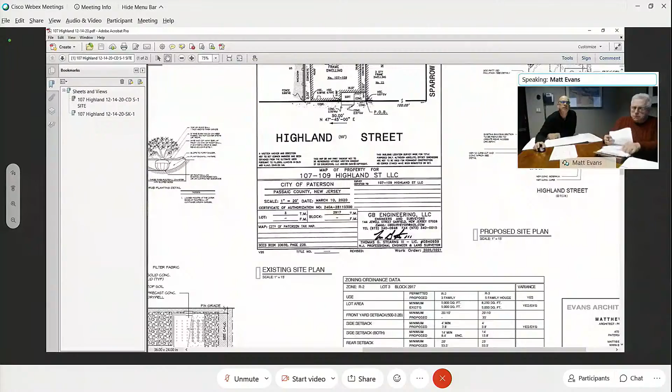You're going to be posting those? Yeah, I can post that. Let me post it now. They'll be coming up now. So we have the existing site plan, which is a survey showing the existing conditions: a 2.5-story frame multifamily dwelling.

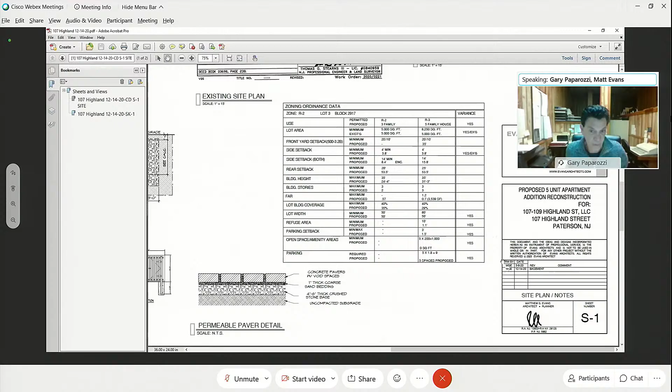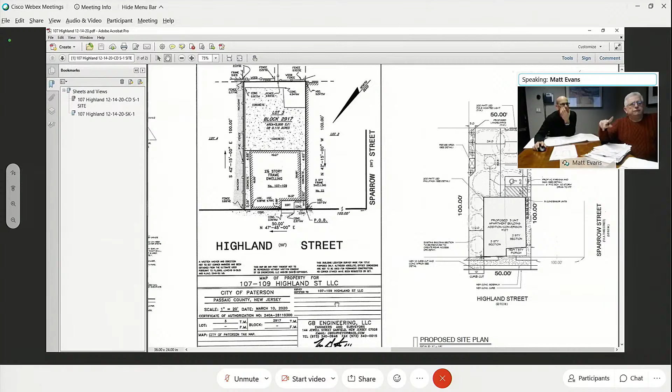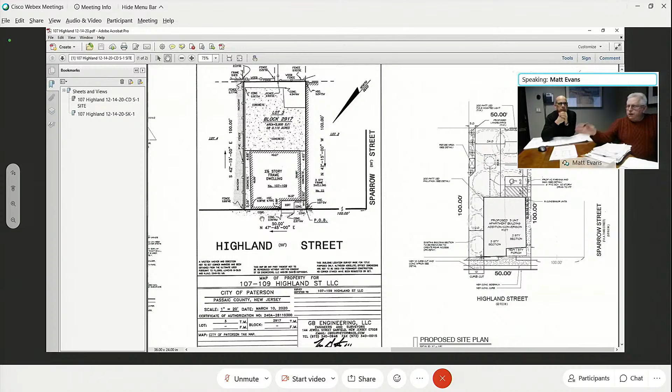So as you can see on Highland Street, the existing structure on the site plan shows the impervious area I mentioned. What we're going to do is show the proposed site plan. If we could go back to the survey - that's an existing three-family structure, just to clarify? Yes. And that property has no front setback whatsoever, right? It's right on the property line, and there's a rear yard area that's not easily accessible - it's just impervious area with a sidewalk to the back on each side. So from there, we're going with a major upgrade.

What we're going to do is reconstruct that building and add a third floor to a portion of the building. I'll go to the site plan. What's significant here is that according to the site plan, we're removing a section of the building on the left, or northerly, side of the property, and that's going to allow us a 12-foot driveway to access the rear yard.

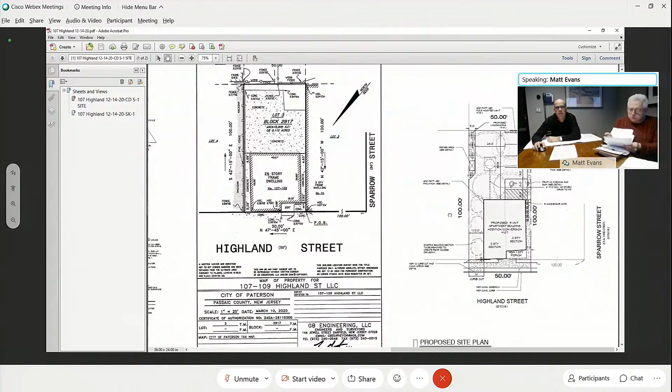We've proposed 5 parking spaces in that rear yard, one of which is a handicap spot. We have a refuse area, landscaping around the perimeter, and lighting. That driveway allows us to use that area to park, so it's a definite improvement on the site - that's part of the proposal.

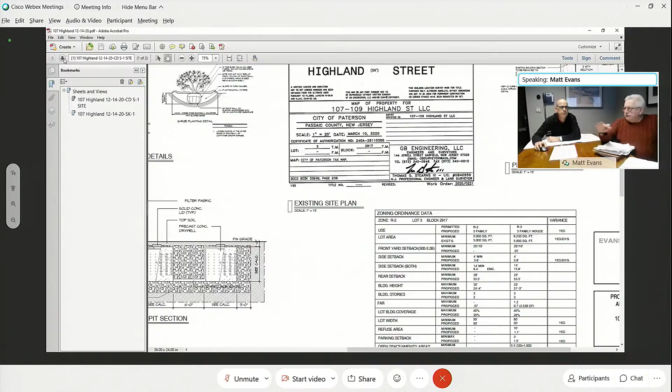Let's go to the architecturals - we can come back to the variances afterwards. First, I'll do the first floor plan. On the left side, you can see the existing building section to be removed. That whole section on the left side is going to be removed, and we're reducing that footprint, putting a 1-bedroom unit on each side - so there are 2 one-bedroom units on the first floor. They have laundry facilities, and there's a main stairwell that accesses the second and third floors.

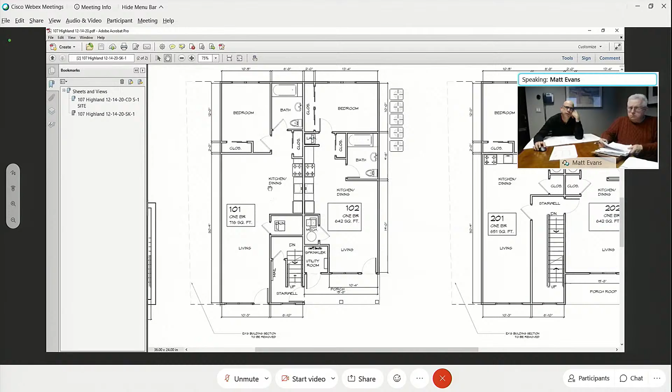Apartment 101 is 716 square feet, which is over the minimum requirement of 600 - we have about 116 extra square feet to work with. Unit 102 on the right side is 642 square feet, which meets the minimum requirement. These would be handicap-accessible units, and since they're on the ground level, they meet the requirements for handicap accessibility.

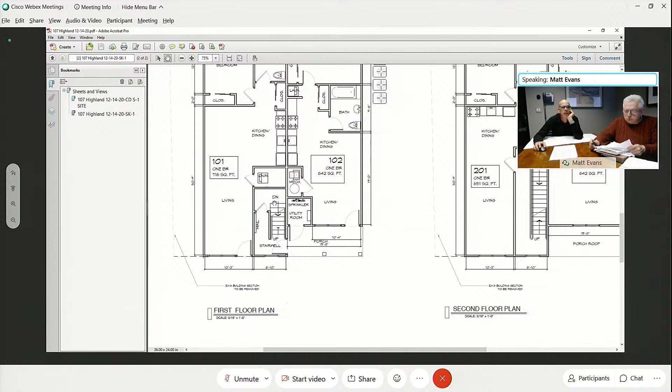There's a front porch which would be reconstructed on the front, and there's also access to a basement, a small basement. There's a door, and we're showing the stairs going down. We have an unfinished basement with a low ceiling height, which would remain just with mechanicals. It's basically a little cellar area, just utilities only, not occupiable.

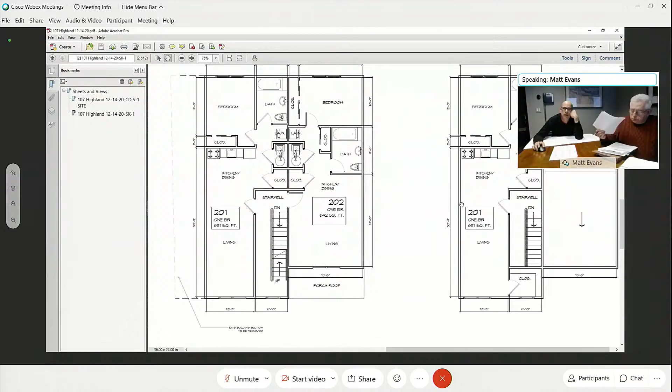Then we go to the second floor plan, which is apartment 201 and 202. 201 is 651 square feet, similar to the one below. 202 is 642 square feet, similar to the unit below that. They both have laundry facilities too. Then we have the third floor, which is the left side of the building, just a 1-bedroom, 651 square feet. So they all have mechanicals, laundry, bathrooms, kitchen, and ample living space on all those floors.

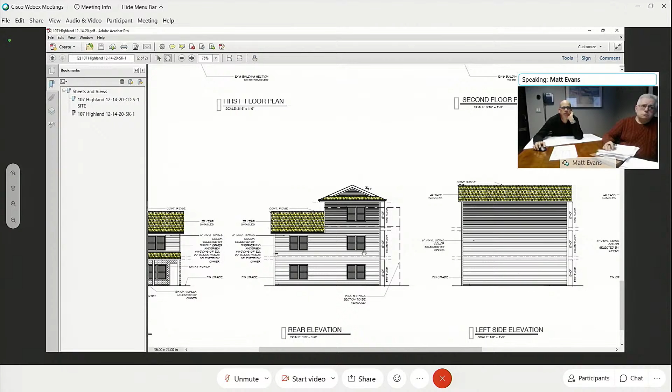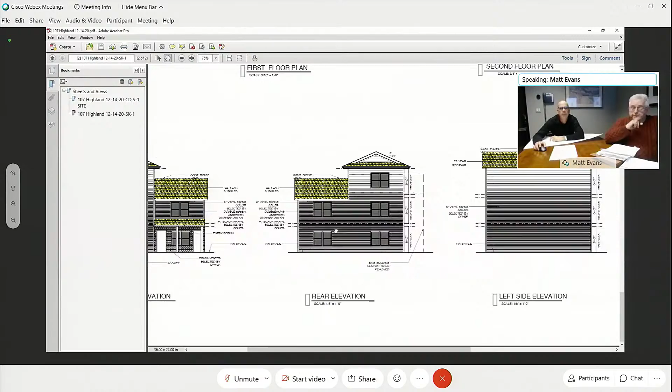Going to the front elevation, as you can see, we're adding that third unit on the top. The existing building would be reconstructed with new siding materials, new roof over the porch, and you can see the 3 entrance doors to the apartments. Showing the rear elevation, similar, it's more simplistic, but we have all new siding, windows, and roofing. Left side elevation would be all new materials, and then the right side, the same condition where we have all new materials on those pieces of the elevation.

So we can go back to the site plan. Yes, and then we show the details.

Going to the zoning table, we're in the R2 zone, and the property is an existing non-conforming 3-family in an R2. We are proposing to make that a 5-family house, basically 5 units, which would be all 1 bedroom. So there's low intensity units on these, converting this down to 1 bedroom units.

The lot area minimum required is 5,000. We have 5,000 square feet for the R2, and for the R3 we need 8,250. We're looking for a variance for lot area on that.

Front yard setback, that's pre-existing non-conforming. We're not adding anything to the front yard, that would remain. Side setback, we have 4 and 14. We have 4, and on the one side we have 3.8, which is a little shy of 4. We'd be seeking a variance for that. It's pretty much in a pre-existing non-conforming condition.

Then we have, both of those was 14 feet, and existing was 8.4, and we'd be removing that previous non-conformity and meeting that with both side setbacks at 15.8 feet. So it's 1.8 feet larger than the minimum requirement.

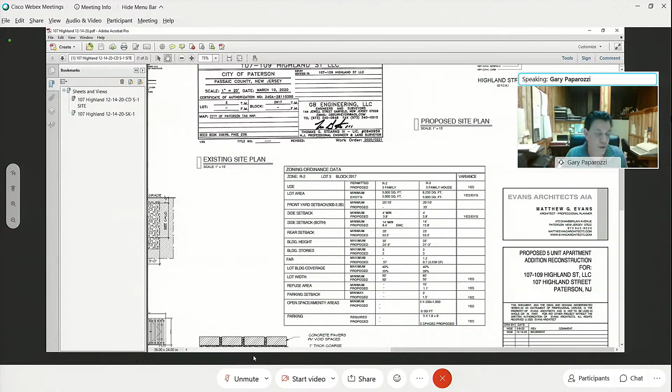So if this plan had to be expanded to include designation of utility spaces, that could be done if need be? Yes. Okay, when I was there, it looked like the basement went through the whole building. Are you saying it did not? Because I don't have access to the inside. Now, it looked like it because there was a window, I thought, in the back as well, but you're saying the basement is short.

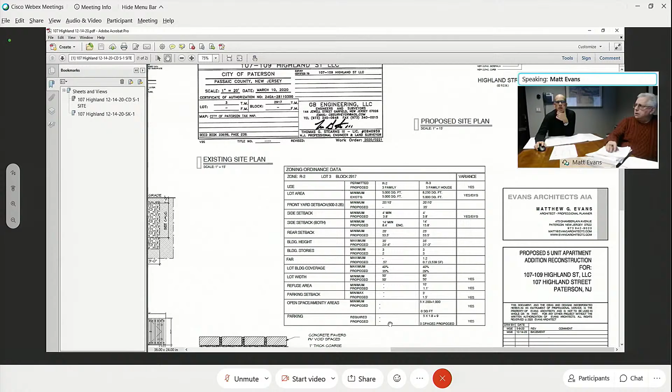Yeah, it's just a 20 by 20 basement section in the front section, but there are areas where crawl space or other ventilation is required for some of the spaces, but it may appear as a basement, but it wouldn't. The basement's not going to be used for any habitable purposes.

It's not for habitable purposes, Mr. Evans. It's included in floor area ratio, which I'm sure you didn't do because I have a different number without the basement. I didn't have a basement. Floor area ratio is only for livable spaces, not maintenance purposes.

No, that's not true. You want me to read it there? Yeah, I'll read it there. What section is that? Hold on.

It's under the definition of floor area. It says, go into definitions, and it says for floor area in dwellings, any basement space permitted to be used for residential purpose, it's being used for residential purpose. It's eliminated in commercial, not in residential.

Aside from that, I got 1.14, which is not a variance, but that was without the basement. So I don't know where you got your 0.7 from, but nobody's gonna reside in the basement. It's not gonna be used for residential purposes, Gary, and as per this description it is for residential purposes because they're using the utilities for residential purposes.

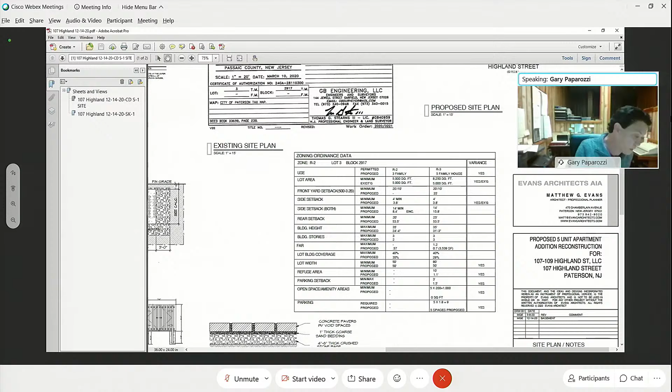That's why I wanted to see the basement plan. Now, if you're saying it's only 20 by 20, okay, but I still didn't include that in my floor area ratio. But there's another section, number 3, it says in all buildings, interior balconies, or cellar, basement with a headroom of at least 7 foot 6 inches.

That's a very low basement ceiling that we have in there. So it's really not habitable, that's what I'm saying, but.

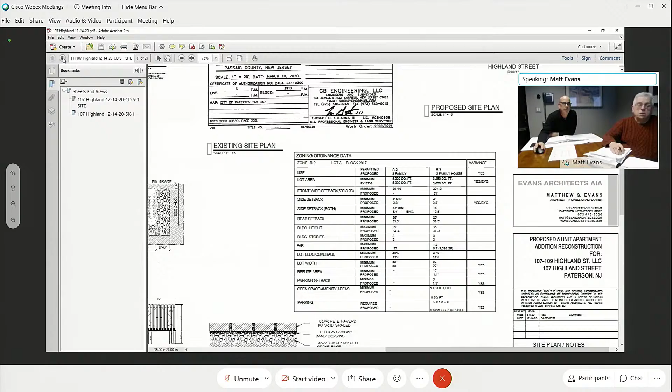I think it's an arguable point, Gary, but we will accept your definition for purposes of variances. We're showing 6'4" plus or minus on the basement area. And it says, in section 3, in all spaces other than the basement. So it doesn't exclude the basement, in my opinion.

Understood. All right, listen, let's go through the zoning chart because I have different variances than you have. And this was also part of the revision that I had asked for, Mr. Margarita. In the future, I am not going to supply a report to the secretary until revisions are made, because it seems that when I make a report, I don't get the revisions until the day of, which I should get 10 days prior.

I already went over this once before. Now, that being said, I have a front yard setback of 20 feet required, 1 foot proposed. And that's a variance, it's not pre-existing because you're adding a roof covered porch in the front. So when you add that roof covered porch in the front, you're expanding a non-conforming and it becomes a variance.

Excuse me, Mr. Paparazzi, repeat that again, please. I'm going through the variances. The first variance, besides use. Use is number 1. Number 2 is minimum front setback, 20 feet is required, 1 foot is proposed, and that's on the proposed roof covered porch that is on Mr. Evans' plan, that was not on the existing survey. The third variance is minimum lot width, 80 feet is required, 50 feet is proposed.

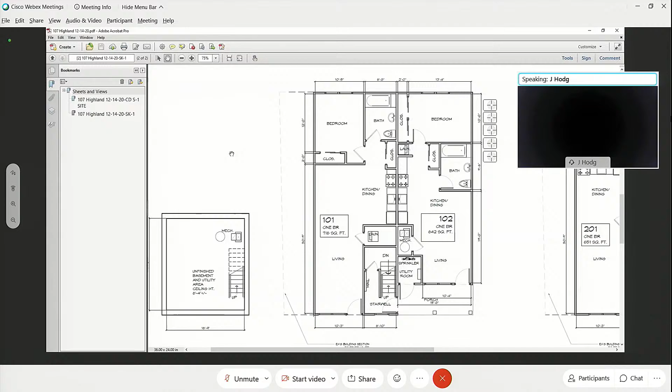Any commissioners have questions of the architect? Yes, this is Jonathan Hodges. How many of the buildings are 3 stories on that block?

Commissioner Hodges, I went through the block, and most of the buildings are 2-family. There was one next door that was either 3 or 4 family, but most are 2-family. And the height that is there now is pre-existing, on the 3-family that was pre-existing. So as far as the height, even though I did not check it, Mr. Evans has it as 31 feet 3 inches. That is pre-existing. From what I understood, the height did not change.

Thank you. You're welcome. Any other questions, Commissioner Hodges? No, that's all, thank you. Any other commissioner?

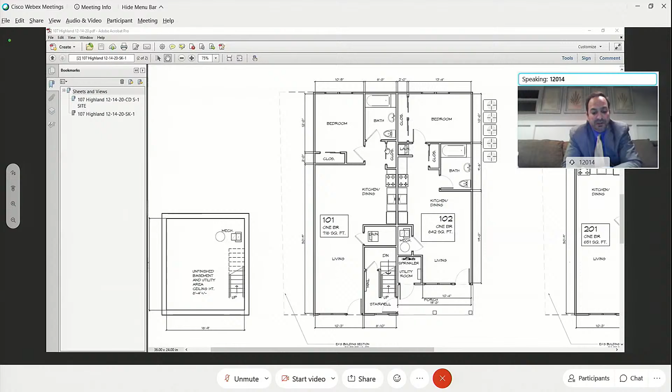May I open it to the public? Yes. To members of the public, if you have questions of the architect with regard to his testimony, please call 973-321-1579 and enter the meeting ID number 711-680-0001. Let's give it a moment to see if anybody calls.

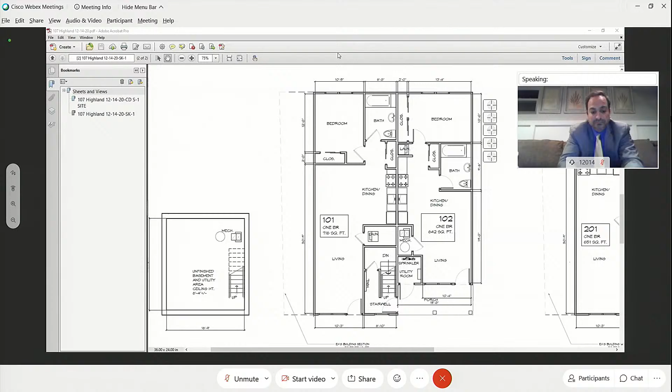Do we have any calls? Chairman Thaxton, commissioners and staff, we have no callers at this time. Okay, Mr. Maricando, your next witness, please.

Mr. Chairman, I'm sorry, I was muted. Yes, I'm going to call the owner. Again, I'll have him discuss what's been done with respect to the outside and the inside of the building. I will point out that the application should stand on its merits. We know that if an applicant is before the board seeking relief, site plan and variances of any nature, his application is to be judged on its merits, regardless of whether work had been initiated and the status of the building at this time. Again, he can confirm whether there are any violations cited, but we would ask the board to follow the applicable law, that the application should not be prejudiced if in fact there is work that has been initiated on the project. Again, that was not something I was aware of, but I think it should not be prejudicial to the applicant in that sense.

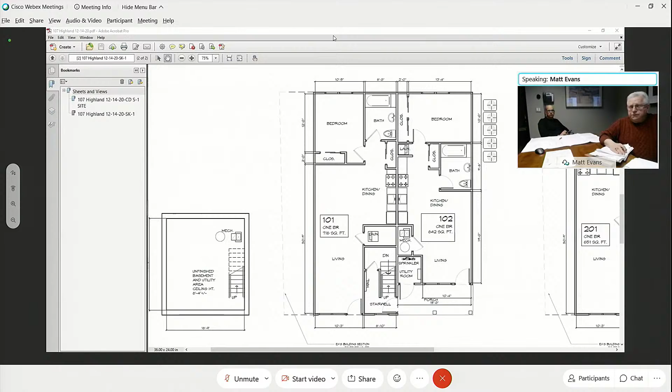I'll call Mr. Barkowski at this time. Yes, I'm here. Please raise your right hand. You swear or affirm the testimony you're about to give is the truth, the whole truth, and nothing but the truth? I do. Okay, Mr. Barkowski, you are the principal of 107 Highland Street LLC? Yes. Hold on one moment, I don't see him.

I don't see him either. You gotta turn on your video, sir. You see me now? Not yet. Are you calling from your cell phone? No, I can see everyone and myself. I don't see you, sir. Okay. Can you see me? His screen is going on and off in the top corner, I never saw it. Video's on. Let me check with IT and see if something's wrong on my end. See the little orange triangle square?

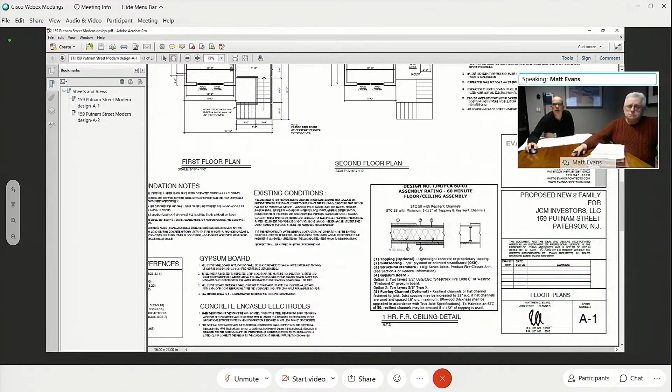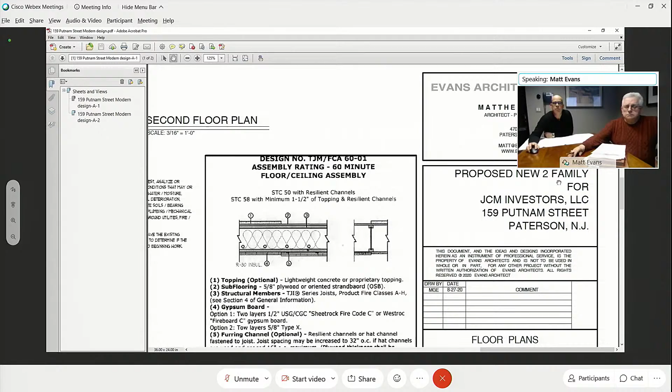Okay, so we have the plan we submitted. We have the date, give me a second, I'm zooming in on it. 8/27/20, so there's no revisions. It's just the proposed 2-family dwelling, and it's a 2-sheet submission with sheet A1 and sheet A2.

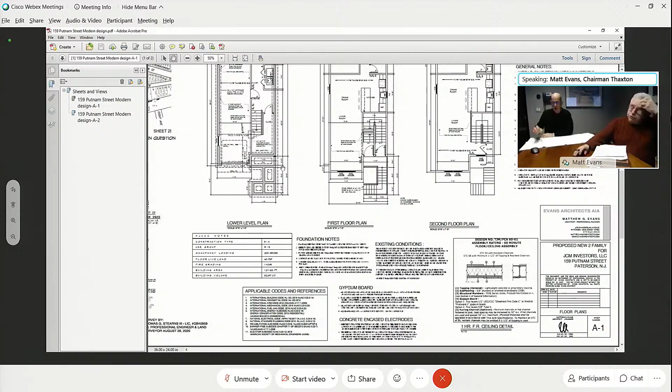Could you start off with present conditions, what we have? So we have a vacant lot, a 2,500 square foot lot. We're proposing an 18-foot 10 by 65-foot deep house, which has 2-car stack parking, storage area in the rear, and a powder room, mechanical, laundry on the ground floor level, and there'll be two 3-bedroom units with 2 full baths on each floor.

The site is presently vacant, is that correct? Yes. Okay, so it's an infill lot that the zoning and master plan calls for hopefully development? Yes. Okay, so you can proceed with regard to describing the units, if you would?

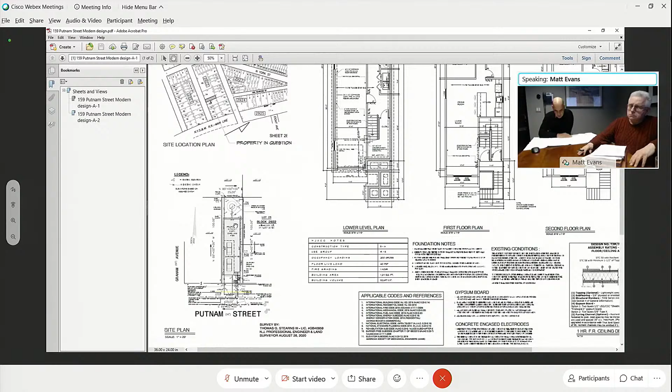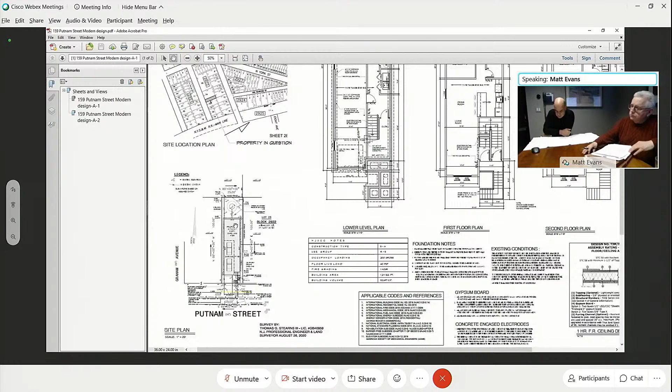Okay, we have, as I mentioned, the ground floor plan and the second floor plan, which is 3 bedrooms, 2 full baths, and then we have a modern kitchen, and we have 2 entrances independent of each other. When you enter the front porch, you have an entrance to the left which enters the second floor, and the next entrance on the right enters a stair that brings you up to the 3rd floor, which is the same layout as the second floor, with the exception that the stair opens up and creates a more open floor with a railing at the stairwell.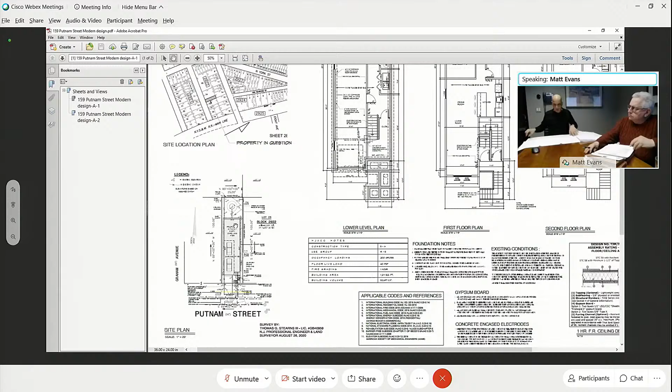Going to sheet A2, we show the elevations, and now the elevations are a little different than some of the other ones. We have a more modern style, as you can see from the front elevation, so it's more contemporary. We have a mix of materials, large casement windows, transoms, and cornice moldings, as you can see in the modern garage door.

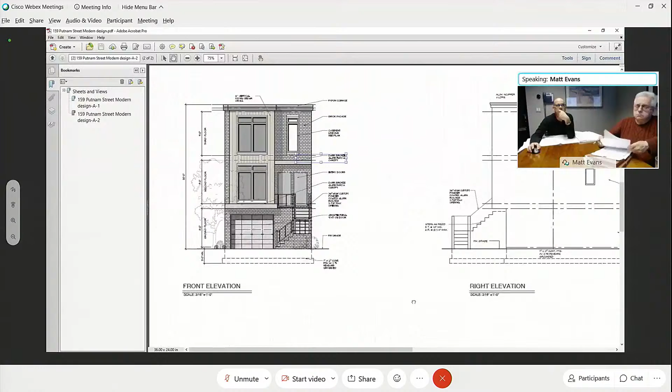That's something the applicant was interested in doing, and we've done it on several houses similar to this throughout the city of Paterson. We usually have this or a traditional house, but this still has nice curb appeal to it. It's 9-foot floors, so we have high ceilings on the 2nd and 3rd floor.

Both units comply with square footage requirements? Yes. Okay, and again, the ground level space behind the garages is limited strictly to access from the 2nd level unit, the 1st unit, is that right? Yeah, the 1st unit gets the basement and the storage area. Right, and there's no full bath down there at all, just a powder room? No, it's just a powder room.

With regard to the surrounding area, and you can relate that to your variance chart if you wish, as far as requirements, how does this compare in terms of lot size? Are there comparable lot sizes in the R2 area around this? Yeah, there's a lot of older lots and older houses on 25 by 100 lots. The only difference with those predominantly is that they were done many years ago, and they don't have garages, so they're limited to on-street parking. But this has 2 off-street parking spaces, and it has the ability for them to park on the property.

Okay, with regard to variances created by this application, there's only a few, is that correct? Yes. Okay, could you just touch upon them? The front yard setback minimum is 20, we're proposing 10. The property would be similar in context with some of the other buildings. Some of them have 0 lot line conditions and are right on the property line, but we would be seeking a variance for that, being that we didn't measure the averages on the block. The side setback for both is 11 feet, and we have 6.2 proposed. The maximum lot coverage is 40, and we're at 50, so we're over by 10%. The maximum parking requirement is 4, and we have, as I mentioned, 2 spaces proposed in the garage.

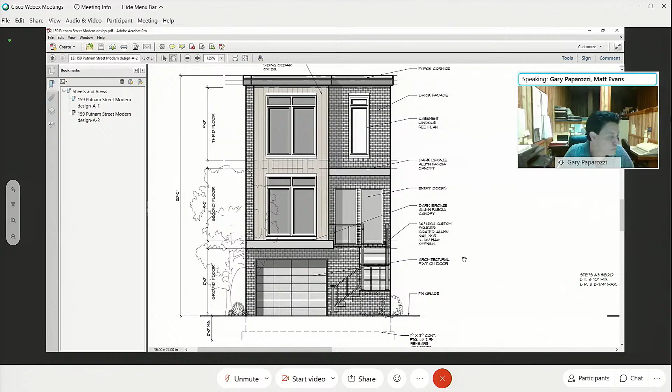Gary. Thank you, Mr. Chairman. Mr. Evans, I know you put the survey on your plan, A1, but isn't Graham Avenue Rosa Parks Boulevard, am I wrong, or is it right? I think it is, there might be a section that might not be, but I consider it all Rosa Parks. I couldn't find Graham anymore, it is considered Rosa Parks Boulevard.

Okay, Mr. Paparozzi, Graham Ave was the old name before it became Rosa Parks. And as some of the tax maps, as you'll see on Mr. Evans' site plan, still use the old reference to Graham Ave, but it's one and the same, yes.

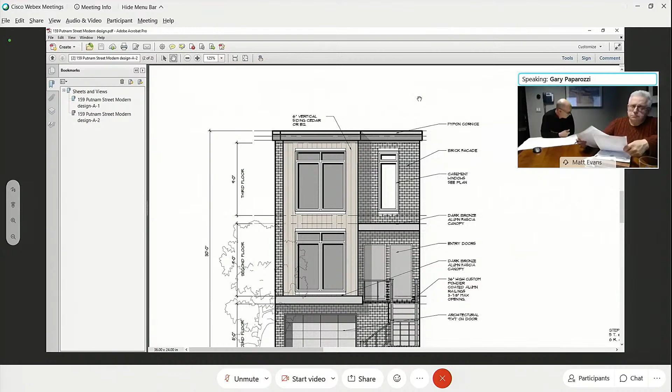All right, so I'm not gonna ask for the survey to be revised because he's not here, but Mr. Marshall, can you just show Rosa Parks here? If you wanna leave Graham as formerly Graham, that's fine. If not, just take it off and put Rosa Parks Boulevard, that would be fine. That's perfectly fine, yes.

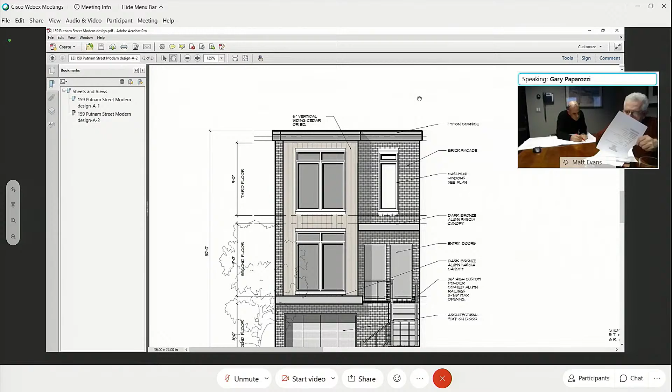Just on the zoning chart, Mr. Evans, you have the side setback at 4 feet, it should be 3 feet, you know that, because of the 25-foot lot, and both should be 11. And the lot width, you said the required minimum is 25, that should be 50. Just make those changes on your zoning chart, okay?

And we're good. Again, Mr. Chairman and Commissioners, we've had several of these applications in the last month. You do have an existing lot, the lot is not being created. Quite frankly, this is the minimum that you could really put up.

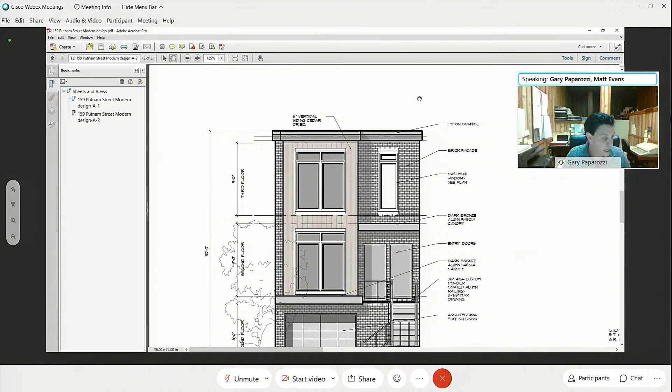The maximum amount of parking that you can fit on the site when you have a construction is only 2 spaces. So, as Mr. Maricondo alluded to, it's in conformance with the master plan to develop these infill lots that are vacant. I have no other questions.

I just, for Mr. Evans, have a few revisions for him if the plan is approved, okay? Thank you, Mr. Chairman.

Any commissioners have questions of the architect?